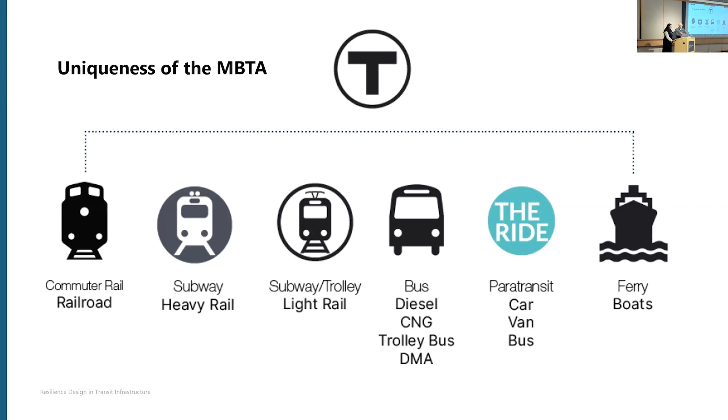The MBTA has identified components of vulnerability in 5 items: sea level rise, change in precipitation—that's what we've seen yesterday, hail, snow, rain, sleet, anything coming from the sky—extreme heat, extreme wind, and snow and ice.

Next slide. Coastal flooding—that's what you see, we're going to talk later about the Long Wharf Aquarium Station. You see that picture on the left; this is probably property of Boston Development Agency, but as you see, flooding affects the MBTA Aquarium Station. So there has to be collaboration, and they had to reinforce the seawall and all that.

On the right side, the picture speaks for itself, but you see that the snow has stalled the Red Line in 2015.

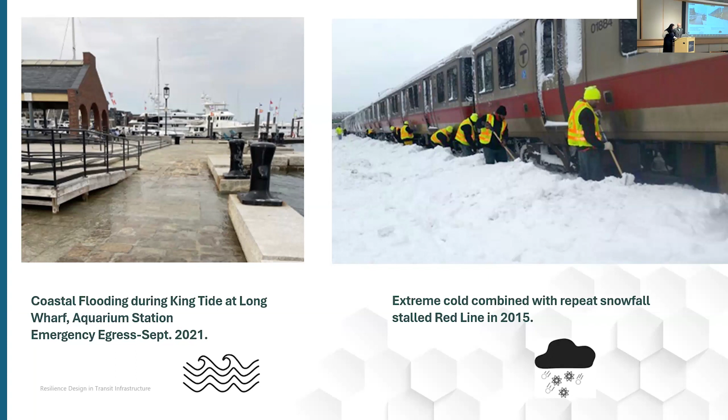Now, extreme wind can also affect service, and if it falls on these catenary cables, it might cause a lot of damage. This is actually what happened in Hurricane Sandy in 2012—there was a lot of damage on the Green Line.

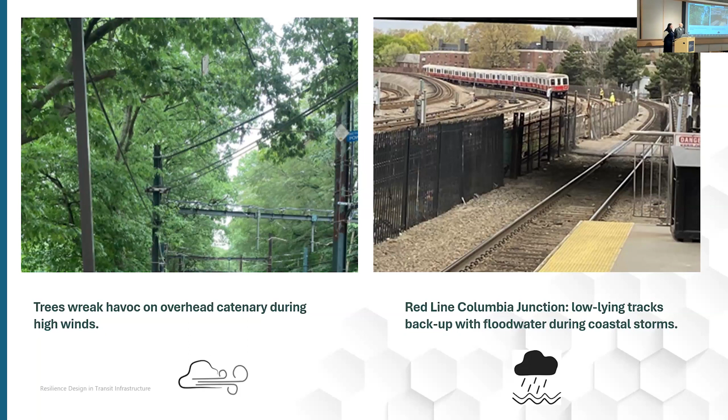On the right, you see this is Columbia Junction, low-lying land where flooding also disturbs service and causes a lot of damage. Heat and high temperatures—one thing is it might cause buckling because of steel tracks.

Another thing is comm rooms. You see the signals for the subway or commuter rail, and these signals are very important—you cannot have service without them. And if these communication rooms, which have the equipment we call BACs, get damaged, then they're not repairable. You will lose signal. It's a lot of money, and it has to be repaired.

So we have to make sure there's redundancy, and we're doing some work currently with the T in order to fortify the communication rooms right now. Again, there's a lot of things that happen in the background that allow our public transit to work.

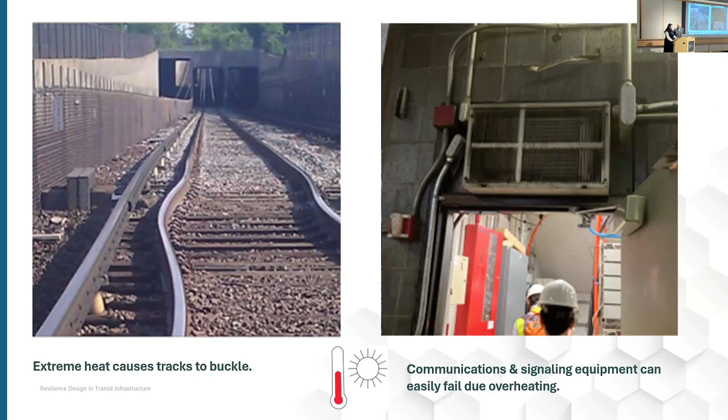So the MBTA has done a lot of work to mitigate all these dangers. They did a climate change risk assessment, and you can see from this exhibit—next slide please—yeah, you can see from this exhibit they have identified

the assets that require study, and for each asset, what is the climate change risk on it—we call it exposure, how climate change is going to affect it. Another factor is the asset sensitivity—how much flood water is coming in, how much heat, and how sensitive it is regarding function and the population group that's going to be affected. By multiplying these two factors, they came up with a score from 0 to 15 to identify how to mitigate.

In the schedule, sea level rise is very high risk with a high vulnerability score, temperature as well, and the rest falls into moderate and low. But you see sea level rise is one of the main issues,

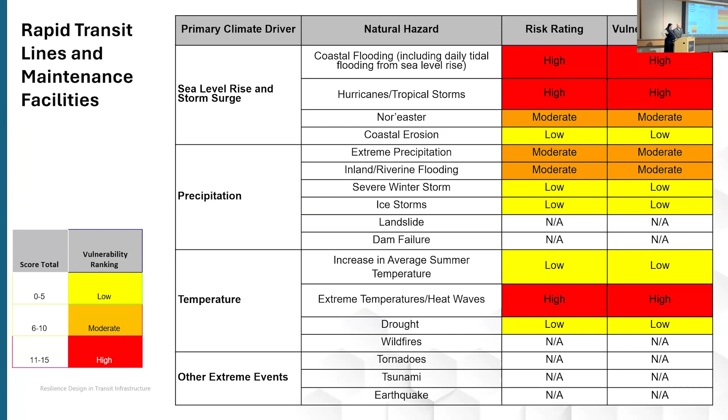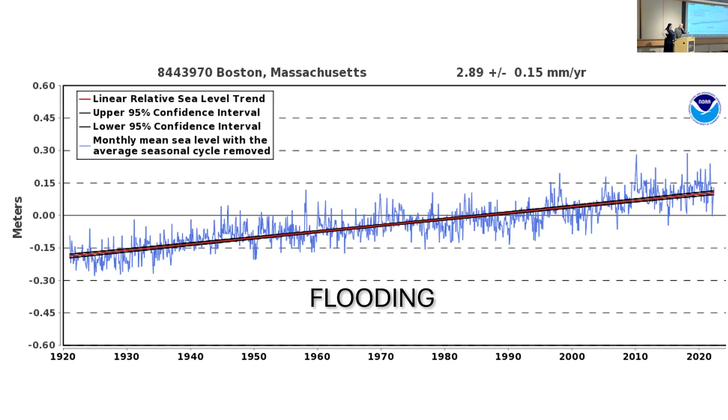which leads us to flooding. If you see this schedule, in the past 100 years, from 1920 to 2020, sea level went up by 6 inches. In the next 100 years, we think sea level is going up by 2.4 to 7 feet.

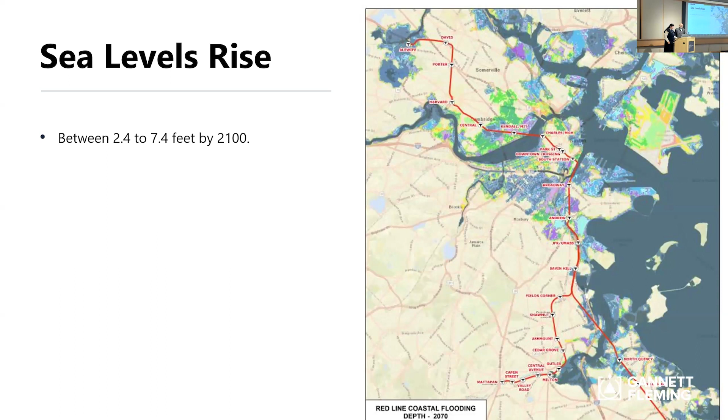The areas where it's more dangerous, more vulnerable, are many—especially communication rooms and fan rooms, because I was going to talk extensively about fan rooms for the subways, and communication rooms as well, but also the elevators. One thing is they can disrupt service, and another is they can cause multi-million dollar damages if they get submerged by water.

Next slide please. Another factor is human health. The T is very concerned about human health for the riders and their employees, because seawater contains pathogens and algae, and it also causes rust and corrosion to the tracks and equipment.

Next slide please. Okay, now that we have established water as our number one threat rather than extraterrestrials, surprisingly, let's talk about what the MBTA plan is.

They start utilizing real-time storm data mapping, connecting it with the national weather maps to get an up-to-date map, so they can mitigate the risks in time.

They also partnered with MIT to come up with a study to work on this. The MIT study went through three aspects. They looked back at how flooding has affected subways in the past.

You see the picture from 1966 where people are going out through a boat - the man in the yellow jacket. We're going to revisit that at Fenway portal. That's the same place in 2020, under construction.

They also used a climate risk vulnerability assessment tool, developed by the Southern California Association of Government, that specializes in transit risk assessments.

And they did a system-wide flood model cost estimate, so they can mitigate based on what the risks are, how much money they're going to spend on it, and how much money they need to fix or mitigate it before it happens. That's also from the study.

The modeling shows, and I know architects love sections, the red line you see in 100 years - Broadway and Andrew both submerged in water. You see the orange line have some water, and the blue line heavily affected.

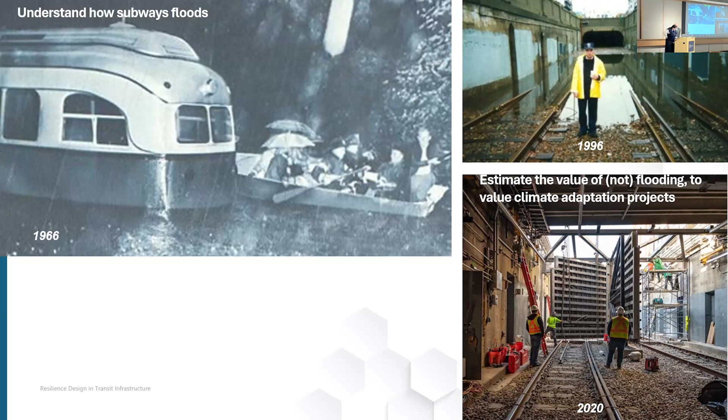We're going to revisit that blue line. If you notice link 10 in the middle of the picture, that channel between the airport and Boston is going to have 15 feet of water depth - one of the highest.

The picture shows you the blue is about 3 to 4 feet, and the dark blue goes above 10 feet. Again, that's probably something we've mentioned before.

So what is the T doing about it? They're doing a lot of work - they've done a lot of flood doors, these aluminum panels you see on the right side of the screen, and water pumps to pump out the water.

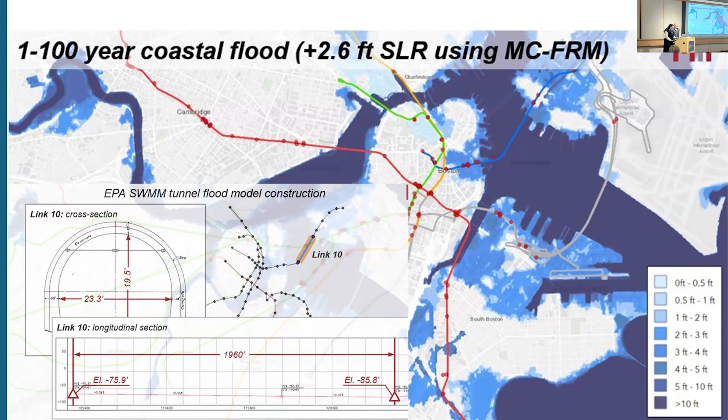Also, the Boston Planning and Development Agency has been helping to fortify Long Wharf Island. If you remember, we saw that picture of the water coming into the aquarium station. So there are multiple factors that go into helping the T - it's not just one agency's work.

Also, the Army Corps of Engineers proposed $52 billion to protect New York, and they're planning to do the same for Boston. Next slide, please.

Remember the picture of the man in the yellow jacket? It was flooded in 1996. As part of the studies, they realized this is one of the areas susceptible to flooding. They started building flood gateways - retractable gateways that would protect the tunnel from water. Same thing with the aquarium station: flood doors, panels, cameras to make sure they know what's happening in real time.

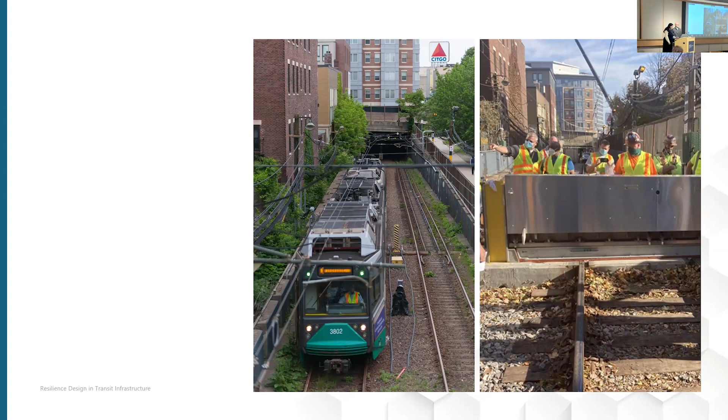With that, I hand it over to Josefa to talk about a very exciting project that he has led in New York City. Thank you, Isra.

So we've armed you with a lot of facts and figures about what's happening with the climate, and you're probably wondering what architects have to do with all this, and how we address it. What can we do? Part of it is understanding what the problems are - this really is one of those cases where it's not purely an architectural problem. There are engineering issues associated with all of this, and finding this intersection between architecture and engineering is key to addressing this problem.

So I'm going to ask you to go to the next slide. Isra's done a fantastic job of putting the overall problem in the Boston perspective, but let's take one step back even further and look at the timeline of storms that have started to happen in the United States.

In 2005, Hurricane Katrina hit the New Orleans area. It was a tremendously significant storm for the area - tremendous rebuilding, tremendous cost, lots of lives lost. In 2017 alone, 3 storms across the United States hit, and of course the key storm that hit the New York metro area was Hurricane Sandy. That project really triggered the project I'm going to show in the upcoming slides.

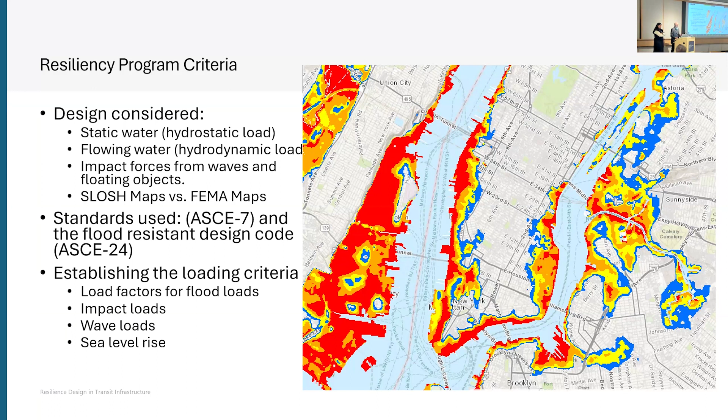The New York City system, not different from any other major metropolitan transportation system, contains stations, which is the part everybody knows. But behind all that, there are ventilation plants, substations, communication rooms, and pumps.

One of the things unique to any coastal city is how much water is actually in the system that needs to be pumped out. For New York City in particular, 700 pumps operate the system, removing 13 million gallons of water per day, and this is normal operation. So when a storm hits, this is a catastrophic thing for the system.

And then building generators - a lot of our transit system, Isra mentioned that redundancy is a problem. For any project in transit today, the eye is always toward redundancy: if this fails, what do you do? You have to have something else. So that was part of whatever we did - it had to have redundant features in the design.

One key thing to note is we always think of flooding as an above-grade problem, but it is a below-grade problem. So anything that penetrates your building, water gets in one way or another. Part of our design issue had to deal with any kind of penetration below grade.

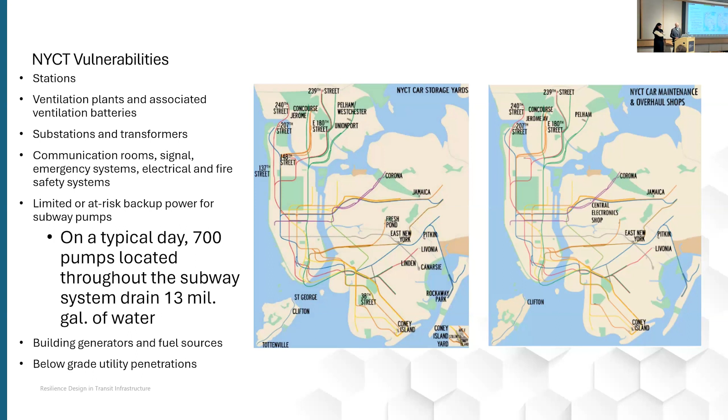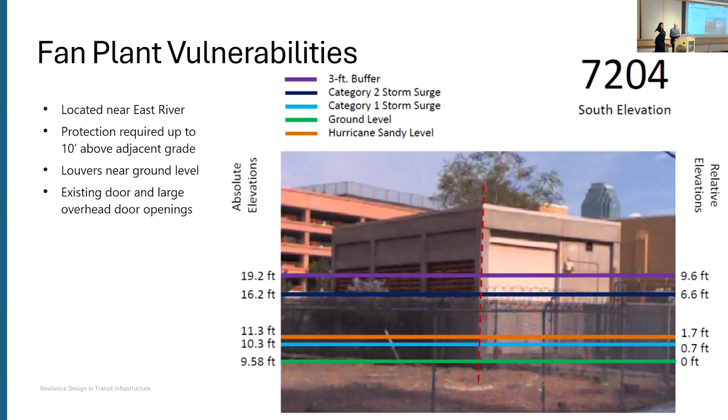Very quickly in the next slide, I'm going to show you what our design solution looked like, but I'll give you a teaser first. So like I said, it's located in Long Island City, Queens. What does a fan plant do? They're not occupied buildings typically. This particular fan plant, and most fan plants, because it connects an underground tunnel, there's a piston effect created by the trains.

So it needs to release air in case there's an emergency and a fire in the tunnel - it evacuates the smoke from the tunnel. They have these massive fans that exhaust the air, and these fan plants are not on one side or the other - they're typically on both sides of a tunnel. Most often people have seen these ventilators all over the place - you see them on your sidewalks. Everybody remembers the Marilyn Monroe scene. So this is sort of the function of what they do.

The site itself is a rapidly urbanizing part of Long Island City, Queens. Oftentimes these fan plants are not things you distinguish in the urban landscape very often.

It did surprise me that the existing building did not have that sort of flavor of 1920s buildings, where there was a little bit more pride in the architecture of even these kind of utilitarian buildings.

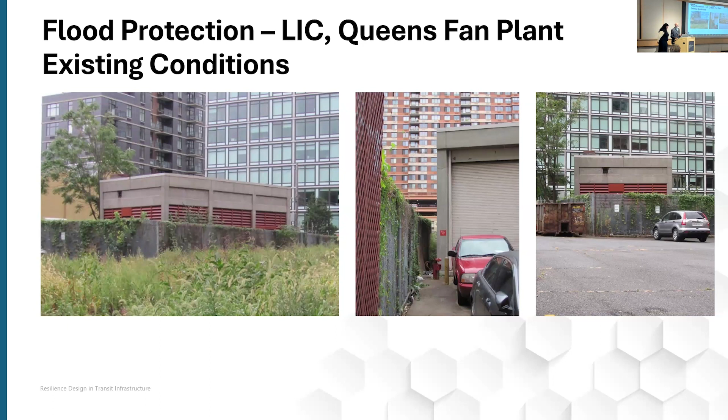These louvers actually surround the back, so three sides of the building have this louver. One secondary function of this particular fan plant, not true of all of them, is that it's an escape route. So in case there's an emergency in the tunnel, there's this tall stair that the public might have to use in order to get out onto grade.

As I mentioned, the louvers are below. These are straightforward elevations that show DFE, which stands for design flood elevation. So they're below what we consider the design flood elevation.

Transformers were at grade, the gray boxes out front. As I mentioned, those gray boxes had utility feeds that go underground, and there's other communication rooms as well that were underground that were issues.

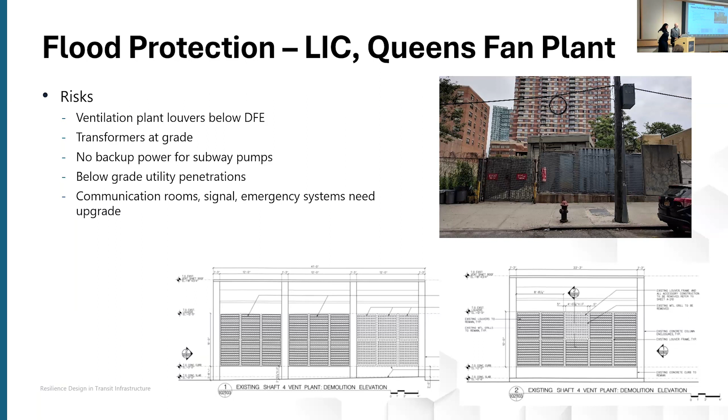The other part of the design also had to do with near-term and long-term solutions. The event happened 10 years ago, but it was going to take 2 years or so to actually implement this stuff, so the MTA was looking for near-term solutions that would be deployable.

So similar to what the T did, where they brought out the flood logs or barriers, they would be put up in case something happened before we actually built the permanent thing.

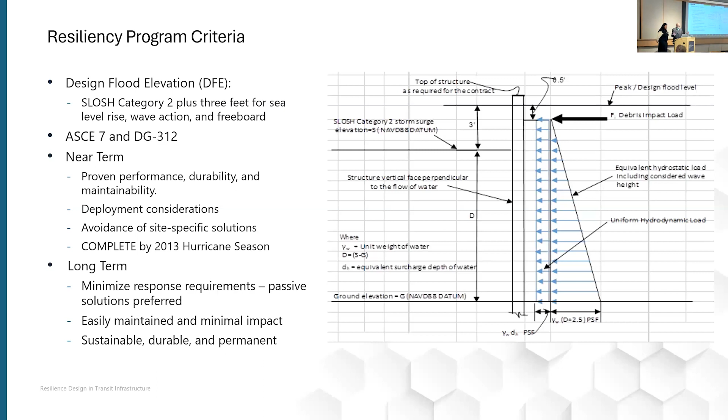And the long-term solution was what's called a passive solution. So what that means is nobody has to do anything except check it, make sure every now and then that it still works, but it's in place. There's not much to be done.

How do you get to the back of the site in order to deal with all the retrofits that we have in mind? You're pinched at the front because of these transformers that are out there, so lots of conditions.

Another part had to do with the fact that the MTA, because this is an operating system, couldn't take this thing offline. So anything we did had to be done in a way that didn't shut down the service of the fan plant.

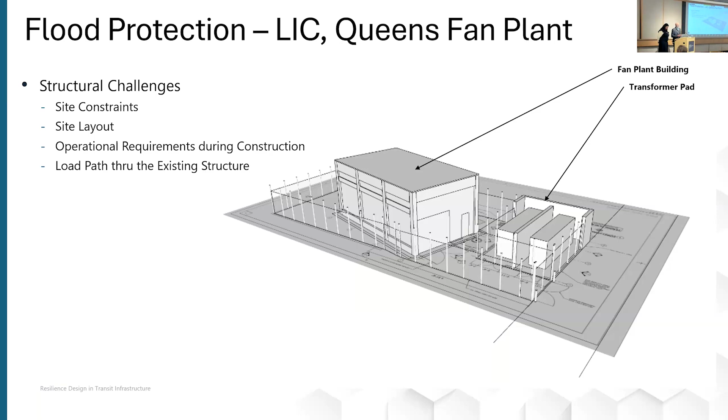So here you see our structural diagram superimposed on the building. Because the building was designed in the 20s, it was not designed for flood load. It never anticipated sea level rise like what we're experiencing today. So we had to find a way to retrofit the building to accommodate these loads. Another constraining factor was that there are tunnels that operate the subway below, so we could not do any deep foundations. That was another constraint.

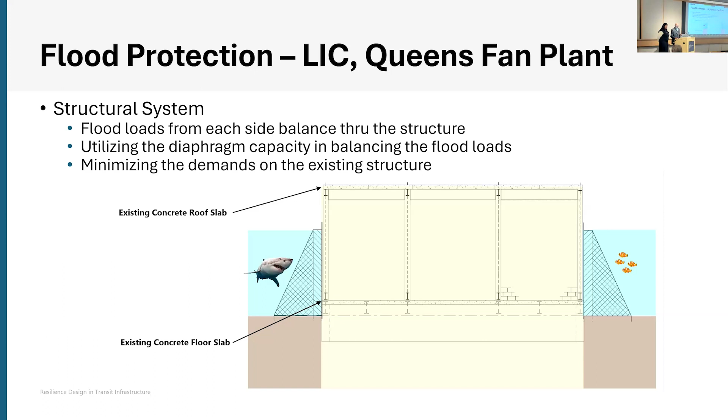Our smart engineers came up with the idea of using the existing slabs as a diaphragm to resist the flood loads. So we built an exoskeleton steel frame and pinned it to the ground floor and roof slab, transferring the loads that way. Obviously, in doing this, we are enclosing the ground floor or lower level of the building, so we needed to build an addition on top. One thing leads to another.

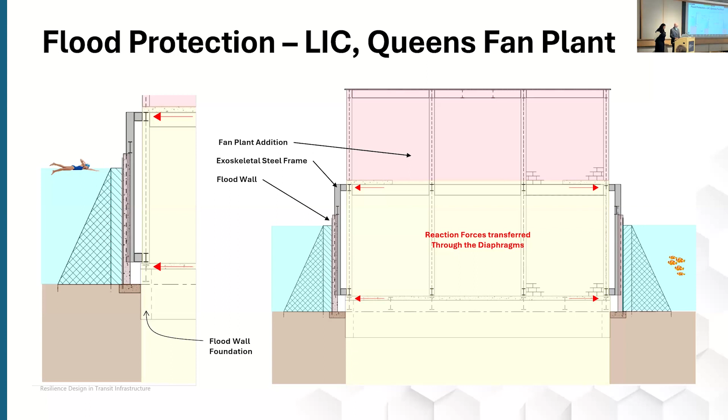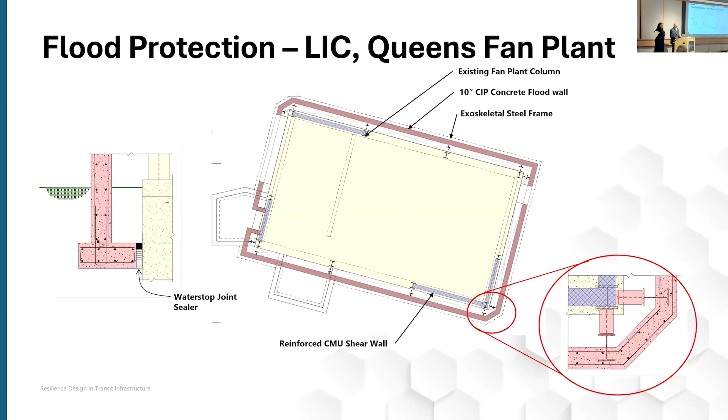The addition at the top necessitated a lateral shear wall system, so we had to install additional structural retrofits to make sure that the addition did not somehow compromise the structural integrity of the existing building.

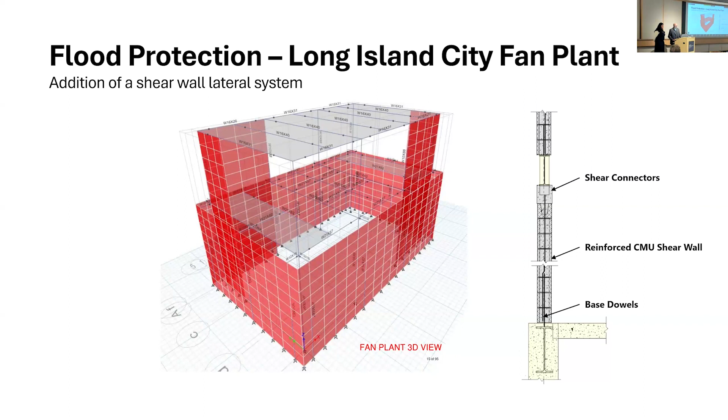So many transit agencies, and I don't mean this as a criticism, they over-design. With the transformer pad, we were lucky that we needed to enclose that pad, and even where it's located, there were major DC feeders running underneath this slab. But it was so robust that it allowed us to anchor and build an enclosure around the transformers, replace the transformers, and build a second story above it. So in some ways, I think we're really lucky that our transit agencies decide to overbuild, because this allows us to make some of these retrofits a little bit more easily than would otherwise be the case.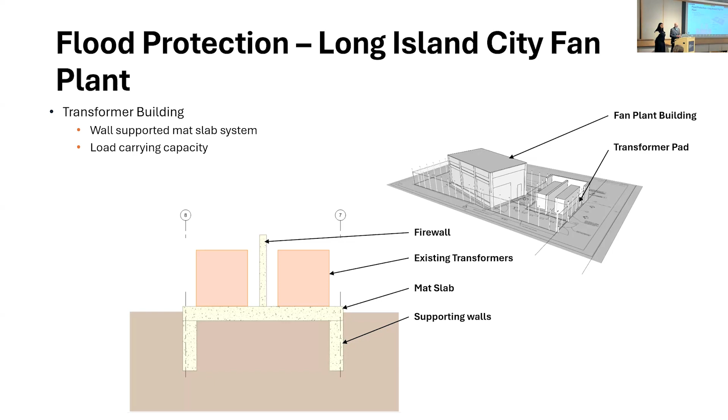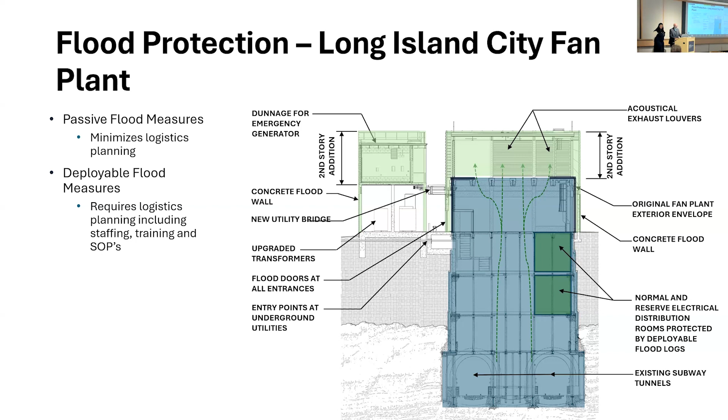Now I'm going to talk about the architecture, finally, after all this stuff. So this is the final solution. We had to build an addition on top, as I mentioned. The building in the front is where the transformers used to be. The black granite cladding is the base, which is the fortified flood wall of the fan plant. The rest is basically a perforated metal screen wall.

The great thing about these buildings, at least from an architectural point of view, is that they're not occupied in some ways, which is good and bad. I like occupied buildings, nothing against it, but it allows a certain freedom that we wouldn't have had otherwise. So we can express some of the functional characteristics of the building. The chosen cladding above was a perforated metal, giving it a certain effect.

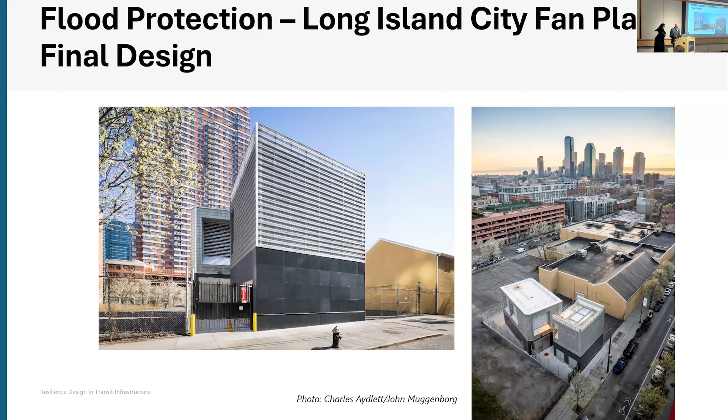Next slide. No graffiti there. No graffiti.

So you can see from the picture on the right, the perforated cladding is an exoskeleton. We really wanted to make a statement out of the fact that this is an addition, built out, which gave it this kind of gauzy feel. You could kind of see through the corners. The louvers on top, as you can see, the new ventilation, gave it a different monumentality.

I'd argue, like with the building previously off the grid, the new addition starts to reorient the building back to the grid at the street level. So there's a negotiation happening there. Next slide.

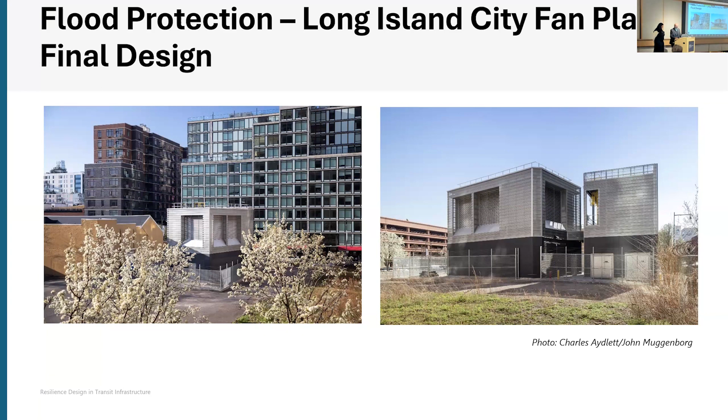Some of the additional functions we had to put above the transformers had new feeds going into the existing building, so we didn't want to create any more underground penetrations, creating new problems. So we created what's this cable bridge. The cable bridge actually becomes a canopy for the new entrance to the fan plant. We tried to make use of some of these things in architectural ways wherever possible.

The figure at the right, you remember the large garage door that was opening up. That was a real challenge. We had to work with vendors who designed flood doors in order to come up with something large enough to take the flood loading. So these guys had to test all of their products. It was all a beta test, to make sure it would function as designed before it actually arrived on site. Next slide.

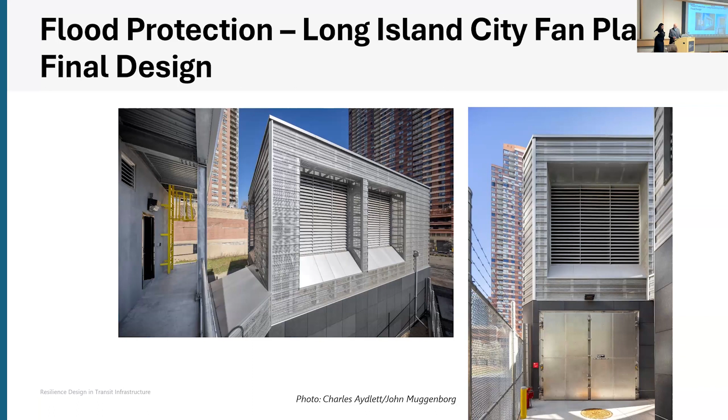So the slide at the right is one of my favorites, just because it's a project that really speaks about the city in many respects. And it's a project that, as a passive building, people don't generally notice these things in the infrastructure or urban landscape, but it's an important function. To me, it was a kind of pleasure to work on something that people don't typically go inside.

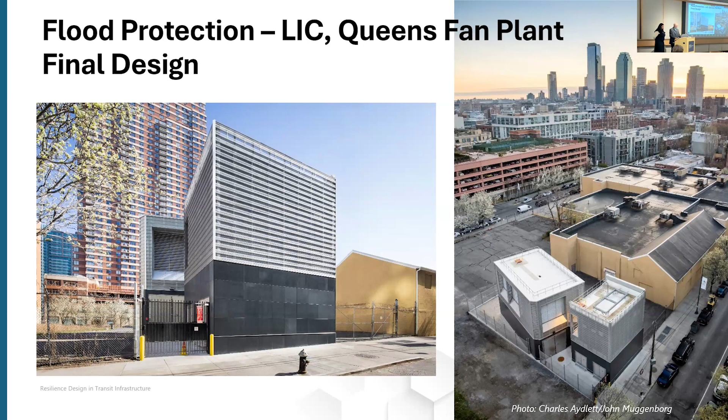I'm going to ask you to advance to the next slide, a view from the back. As I understand it, the yellow building to the right of the fan plant is actually an art storage warehouse, top secret stuff. We were never allowed to access it. I think armed guards greeted us at the entrance. You cannot go in there, but because of the art, whatever we built next to it, they were particularly concerned about any kind of vibration. So there was an unintended additional challenge there.

When I went to architecture school, transportation was not really talked about as an area for architects' influence. To my pleasant surprise, there's a lot we can do as architects to influence these public spaces. They're sometimes not seen as the glamorous projects that architects get, but there's so much we can contribute. There's so much interaction and intersection between architecture and engineering in these types of spaces and buildings. I would really hope some of you might, through this presentation, be a little bit inspired to look at these buildings in a different way.

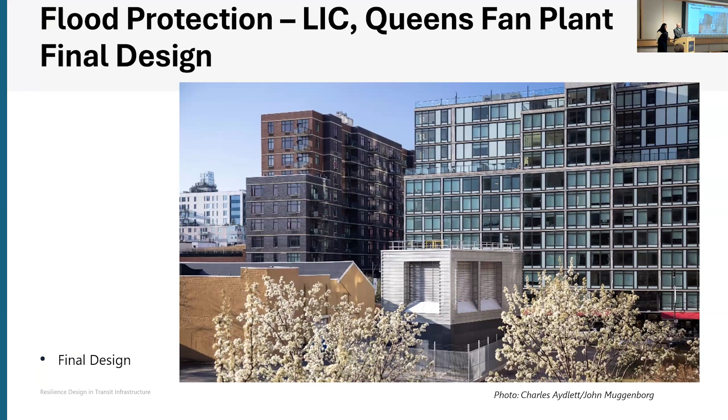Any questions in the hall? If there are none, I'll... I have one comment. Can I be heard if I go to the podium?

Don't go far. This morning, the very first presentation at 8 a.m., we were looking at Iceland. And we all know that Iceland has geothermal power just from digging underground. Very often when I walk around New York and Boston and see these infrastructural buildings, I think of these cities having their own infrastructural power that's getting lost into the atmosphere. So all that heat that's being removed from the tunnels, this gorgeous new building—is there any thought to giving it over to a nearby building that needs that warmth or cool over time?

Yeah, I think there's a lot, honestly, to be done with all of these buildings, and there's a lot of thinking that could go into how we can make other benefits happen when we do these projects. I think we were able to do some of that with this project, but what you're bringing up is fantastic. I think unfortunately there are certain funding limitations that prevent them from going on. But I think this is where an academic institution, in my mind, can really contribute to the way people think about these projects. You could start to say, what other benefits?